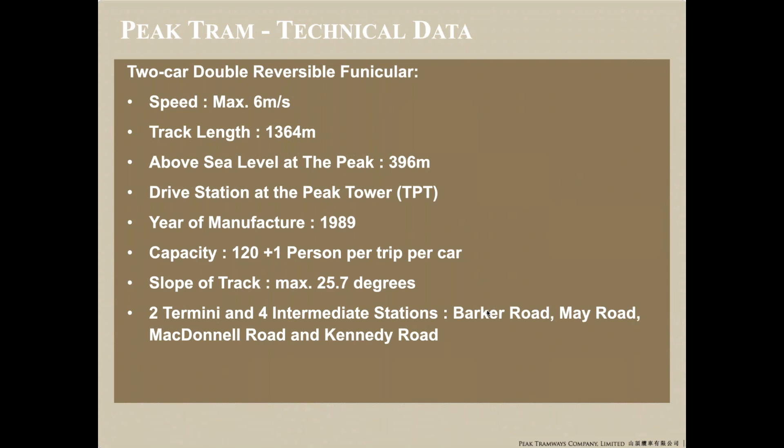And the maximum slope of the track as we get to May Road Station is 25.7 degrees. And that's very interesting if you've ever tried to get on or off a train when the train's at 25.7 degrees, but the ground you get off on is flat. So that's quite an interesting demounting point.

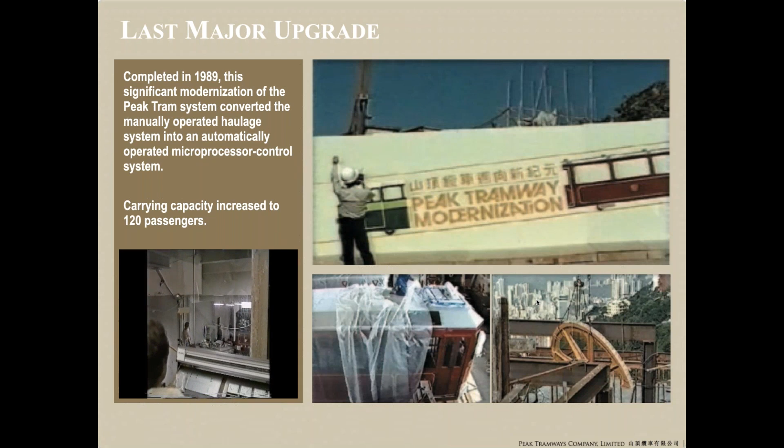And here is some of the 1989 modernization. We have a documentary from the 1989 renovation, and it's quite fascinating, and you'll see in this little clip that's running, hopefully running okay for you bottom left, the complexity of that PLC logic controlled system for computer controlling the equipment, and the old teletype printers. But in 1989, that was state of the art.

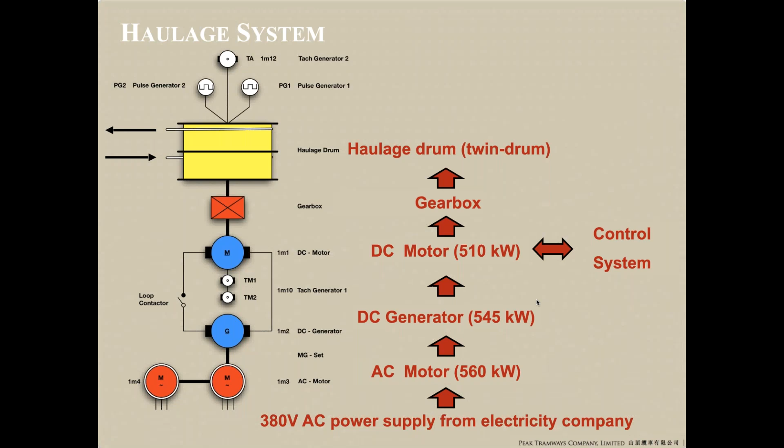How does it work? We basically get 380 volts AC from the local electricity supply company, not yours, Jim, it's the one on the island, I'm afraid. That runs into an AC motor through a DC generator into a DC motor, and we apply the control system at and on the DC motor. The DC motor then goes through the gearbox to drive the haulage drum, and a lot of our instrumentation is then positioned on the haulage drum.

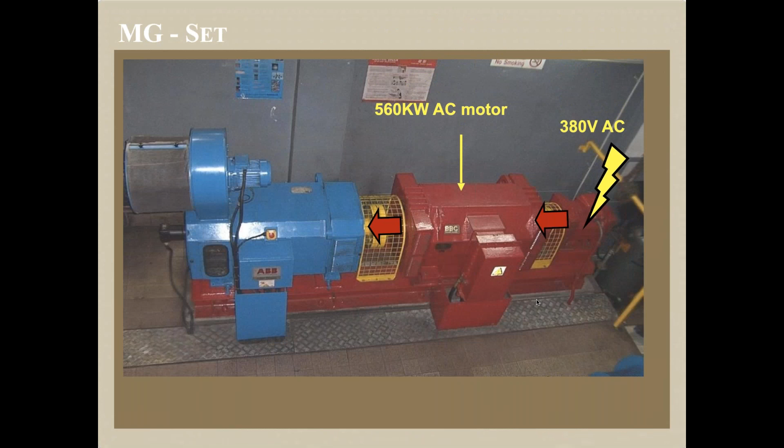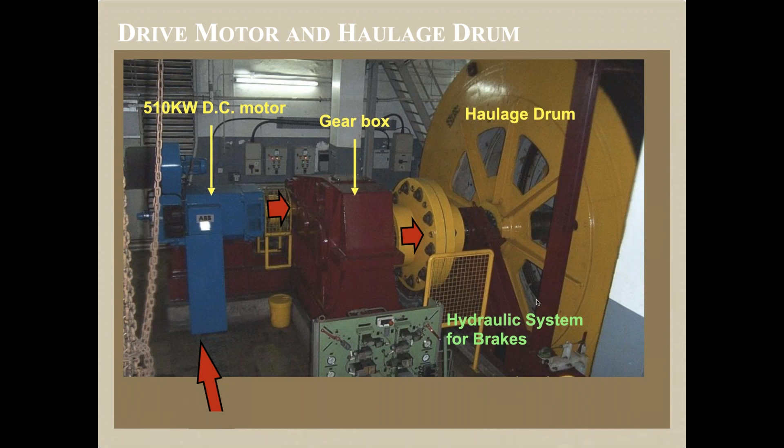Bit by bit, here's the power coming in. Here's a very old AC motor into a DC generator, through floor trenches, across to the DC motor, across to the gearbox, and across to the haulage drum. And just at the foreground of the picture, you can see the hydraulic system, which then feeds the brakes.

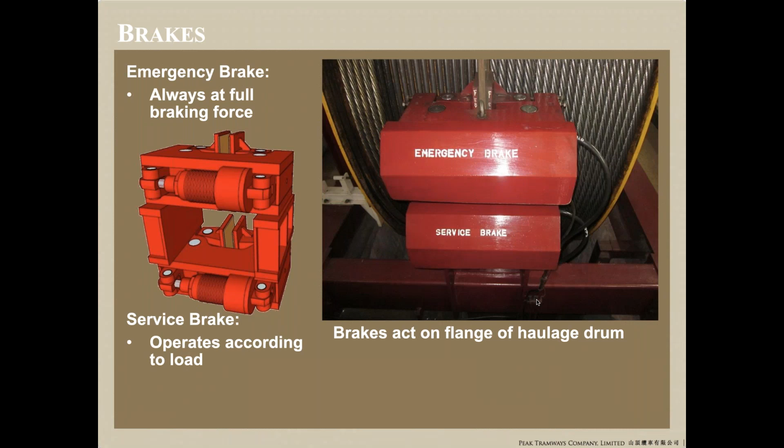And on the existing winch, we had a pair of brakes, 2 emergency brakes and 2 service brakes. We had 2 ropes wound on the drum, each length just over 1.5 kilometers and a diameter of 44 millimeters. So they're quite substantial ropes.

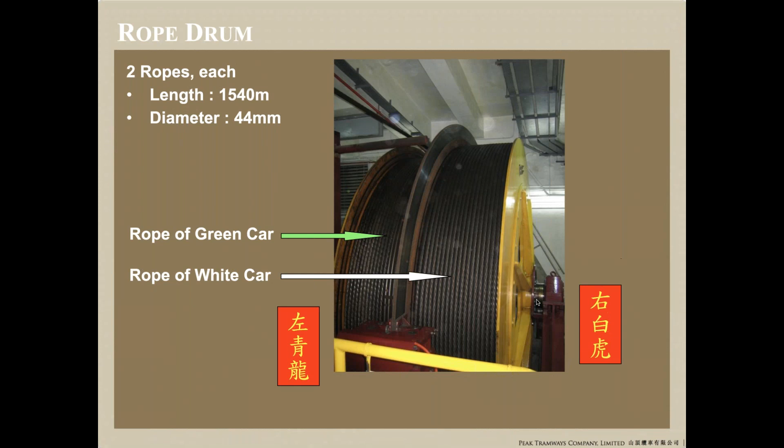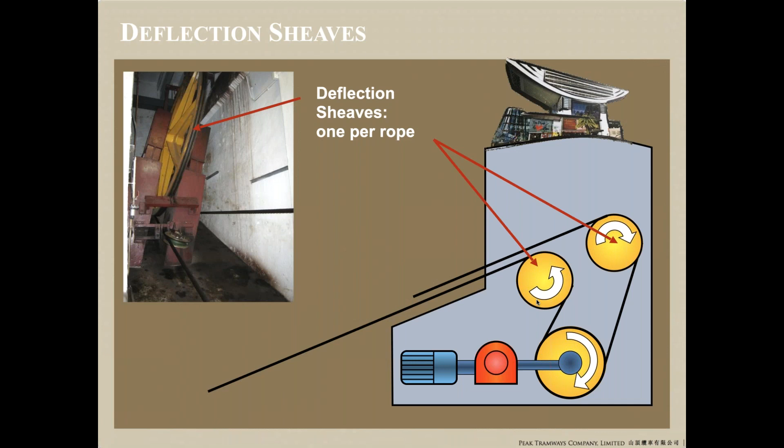Again, there they are, the white and the green car. And then we have 1 winch, but 2 deflection sheaves. And as you can see, what happens is when the winch turns, 1 rope is winding in and 1 rope is winding out, which is why the 2 tram cars then can run in opposite directions as a counterbalance to each other, if you were.

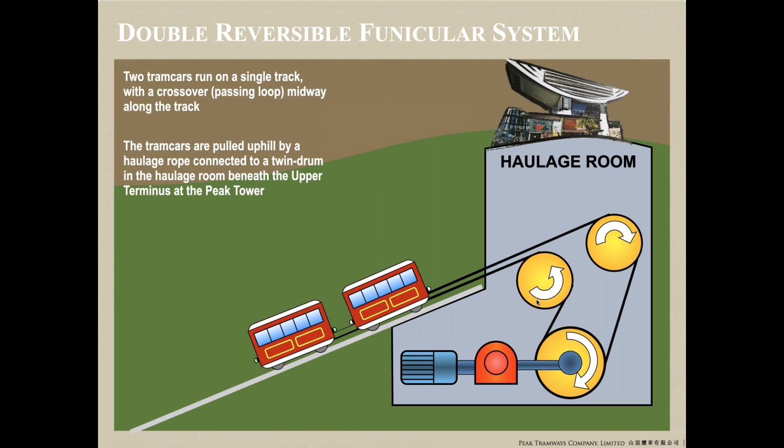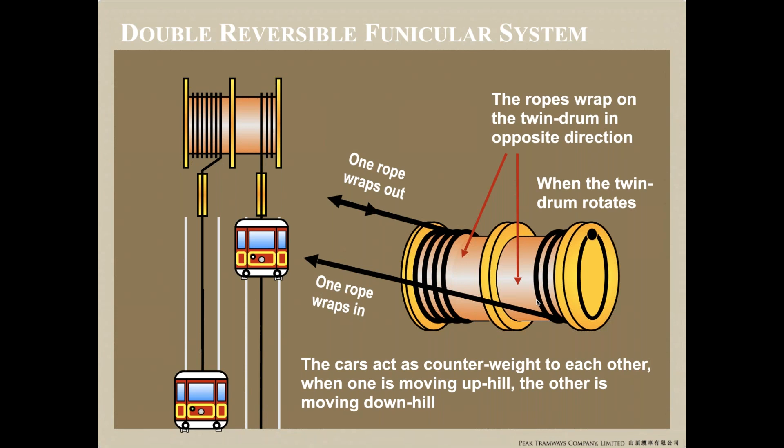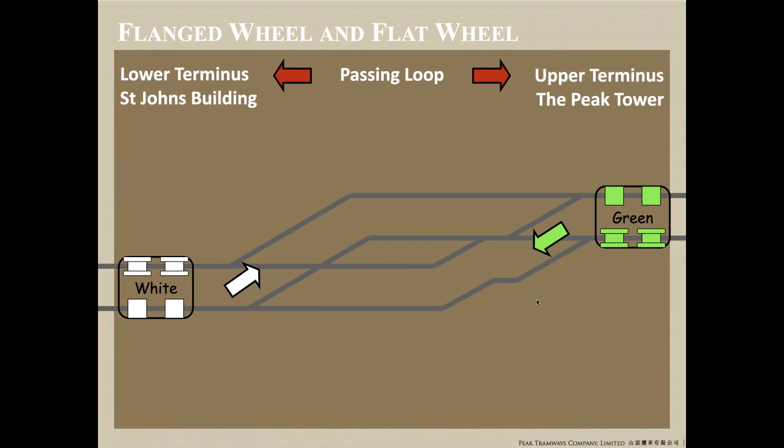The track itself, as said, it's about 1.3 kilometers long. And this is how it works, because on a double reversible funicular with a passing loop, we actually do not have any points. We used to have some points on there to get into a railway siding, but we don't need any points because on each car, and there are only 2 cars, there's a set of flanged wheels and a set of flat wheels.

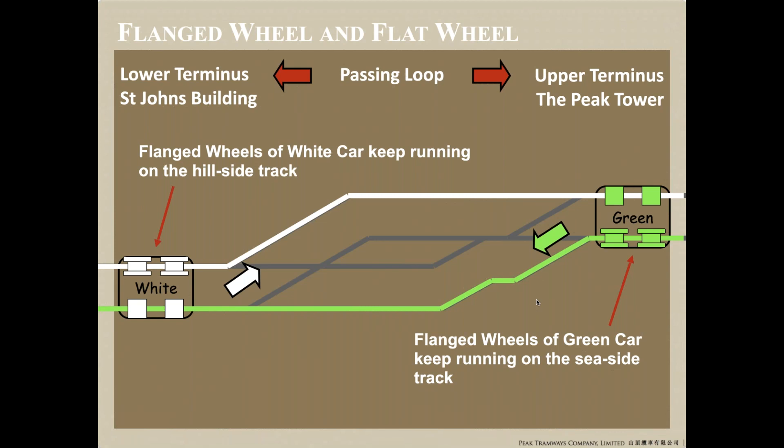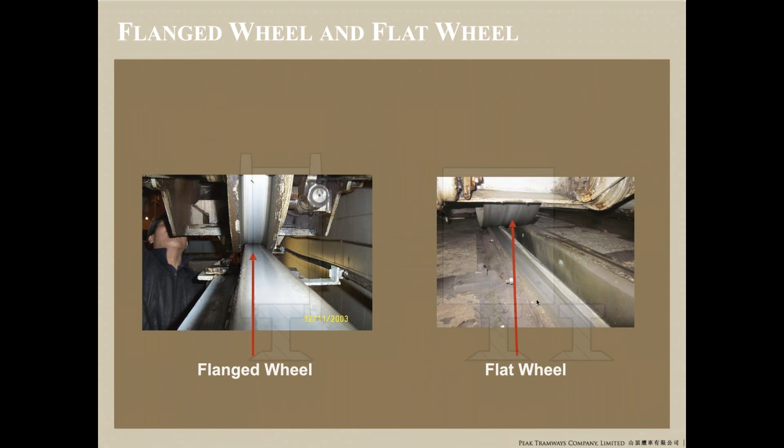And the flanged wheels make the cars run on the outside rail, depending on which one it is. You can see on the left there is a flanged wheel, which hugs the railhead, and a flat wheel, which slides across and allows the tram cars to run over the crossovers.

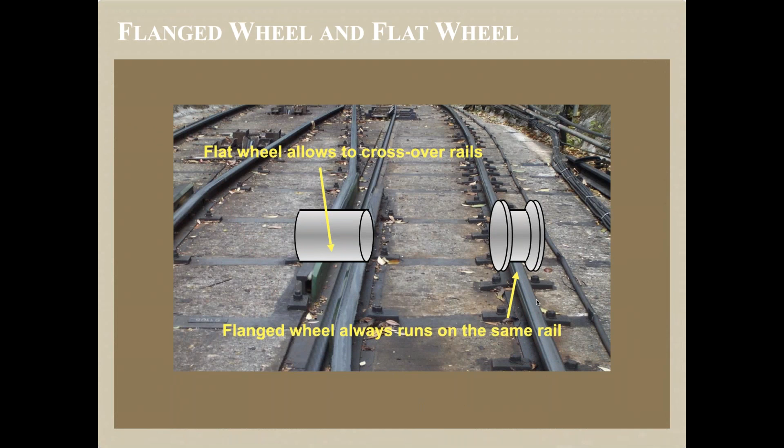And there you get a graphic of the flanged wheel over the outside rail and the flat wheel running across the crossovers. So why am I here? What are we doing?

The challenge as we had it was an increasing patronage. As I said, we became an essential tourism attraction, and as we got up towards sort of 4.5 million passengers, we had a bit of a dip in '97 near to the handover. We had a big dip in 2003 when SARS hit. But since around '97, we've been tracking passenger demographics and looking at the increase in passenger numbers for each of those demographics. I think the peak was in 2016, where we served over 6 million passengers in the year.

And the interesting growth on this graph is that the so-called foreign individual tourists make up the majority of that, which is the green shaded area. But the grey shaded area is tour groups, and there was an ever increasing number of passengers as part of tour groups. And that's important for us as an operator, because we have to understand our business model and our demographics. And then we have to cater our offering accordingly to make sure that our different classes of passenger are all happy with the offering.

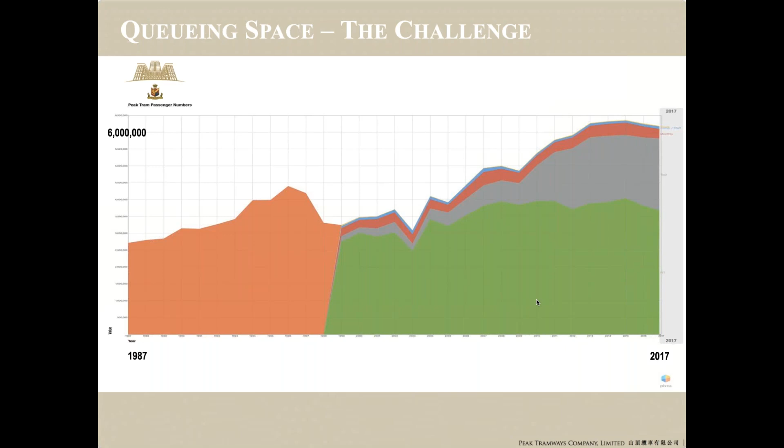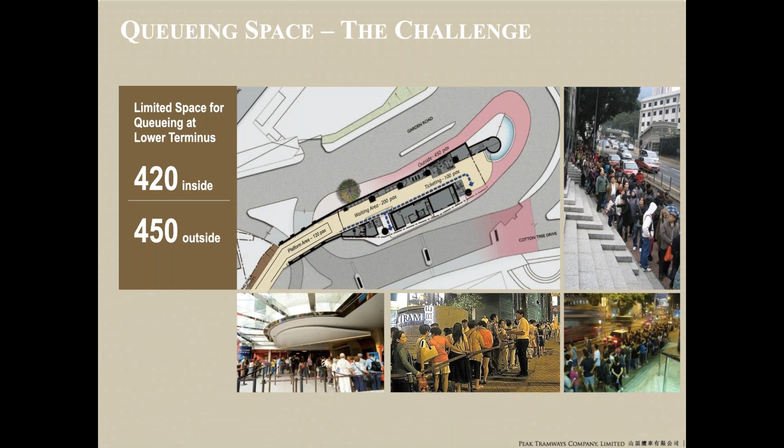The difficulty for us was when we were pulling 6 million passengers a year, it got very busy, and in particular at the Lower Terminus, which is where most people would catch the tram from, there were some horrendous queues which wrapped all the way around the building and out onto the street, because inside the building, when it was first developed, we only had space for about 420 passengers to wait. We could quite often have 2,000 passengers in the queue.

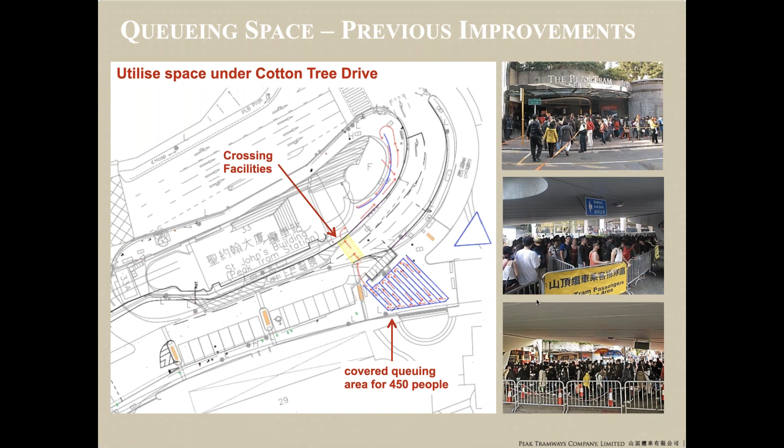To improve matters, we housed some of those waiting passengers. We borrowed a bit of land across the road under the flyover, so at least they were protected from the sun and the rain, and that helped us to stack up another 450 people. But as you can see, during the busy times, queues formed up quite quickly, both at the upper and lower terminuses. The queue times sometimes at the Lower Terminus were over 2 hours, and that was intolerable. So we needed to do something. We needed to do a capacity upgrade.

Now, because of some of the existing infrastructure along the tramway, we run under several road bridges. We can't make the tram cars any wider, and we can't make the tram cars any higher. The only thing we can do is make them longer, and that is indeed what we've done. So the current tram car shown bottom right is around 18.7 meters long, carries 120 passengers. The proposed tram car is just over 33 meters long, carrying 210 passengers.

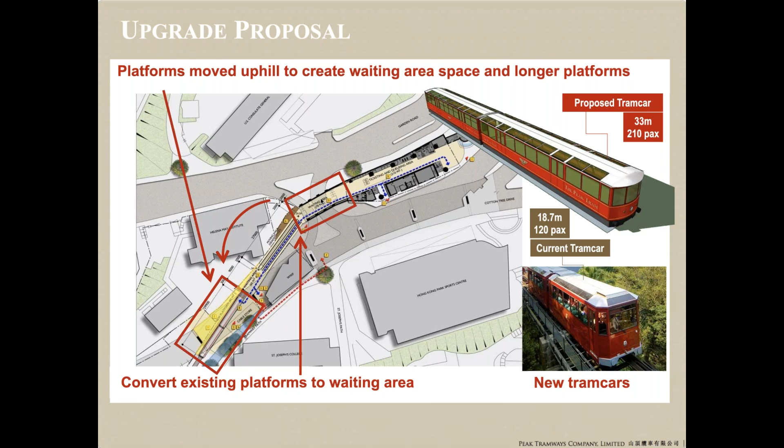And what we had to do was actually move the platforms from the existing platform area, which is here, attached to the St. John's building here, and move it up the hill by about 75 meters. And what that allowed us to do was, first of all, get this very long articulated tramcar into the platforms. It wouldn't have been able to turn the corner into the old building. And it also then creates a lot of space downhill of the new platforms, so we can create a new terminus to house people who need to wait. And that is why we came up with the Peak Tram upgrade project.

A quick comparison of the main technical headlines here, and the one worth noting is the length. We've shortened it by, let's say, 75 or 80 meters. The capacity goes up from 900 to 1575 passengers per hour per direction. The haul rope diameter goes up from 44 to 50.5 millimeters, which is quite a substantial haul rope. And clearly then our peak motor power goes up quite substantially as well.

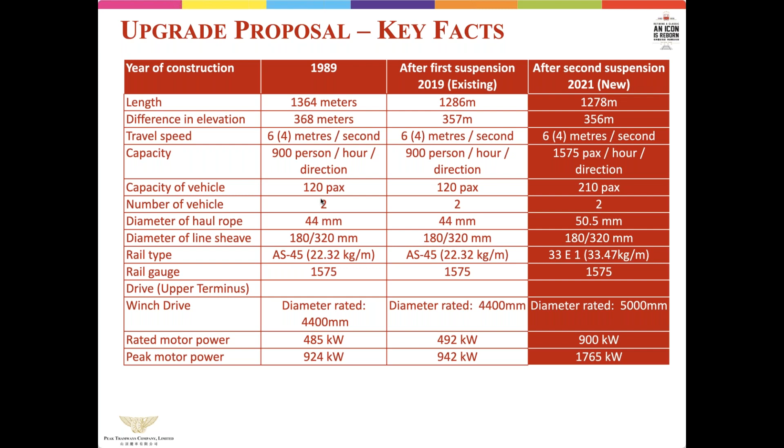To allow us to do that, we have to change the rails and the ropes. We have to do significant foundation and bridge strengthening to take the extra weight. We've actually had to demolish and remove and reinstall brand new haulage equipment at the upper terminus. We need a new, bigger winch, a bigger gearbox, bigger motors, bigger electrical and control cabinets, deflection sheaves, and an item called a rope length compensation device.

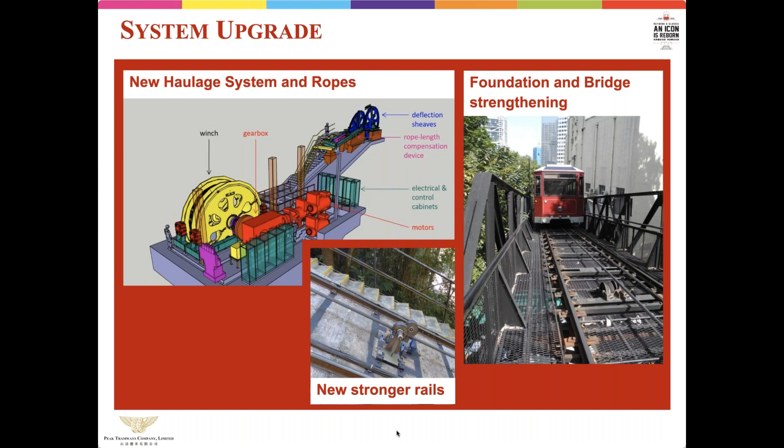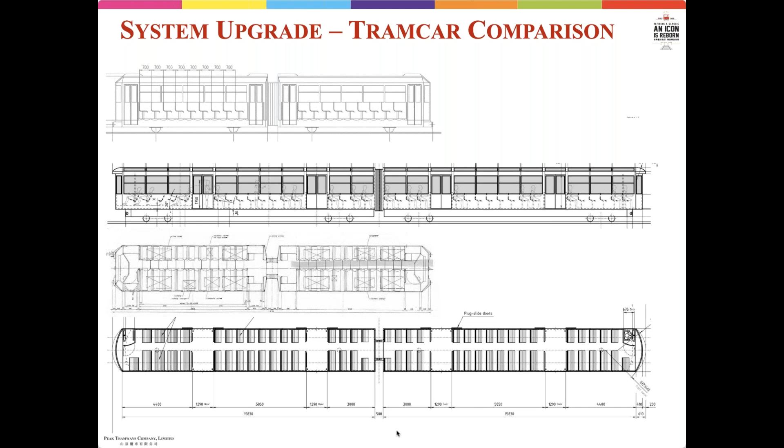Here's a comparison on the tram cars. And as you can see, the increase in length there and the additional number of seats that we've managed to install. I'm not showing you the color of the tram cars because that's not available yet.

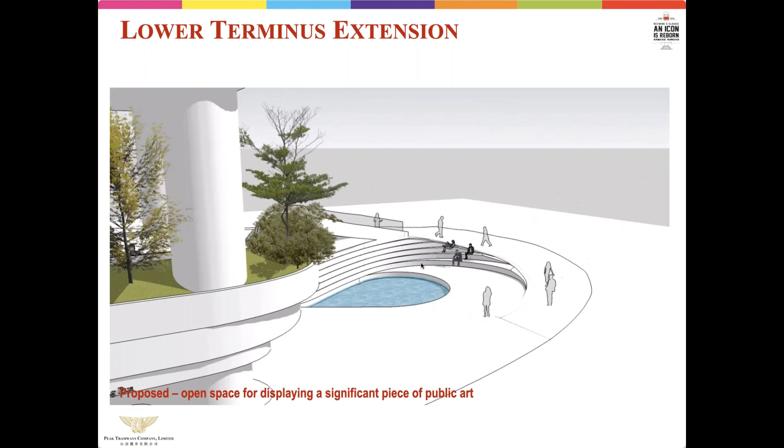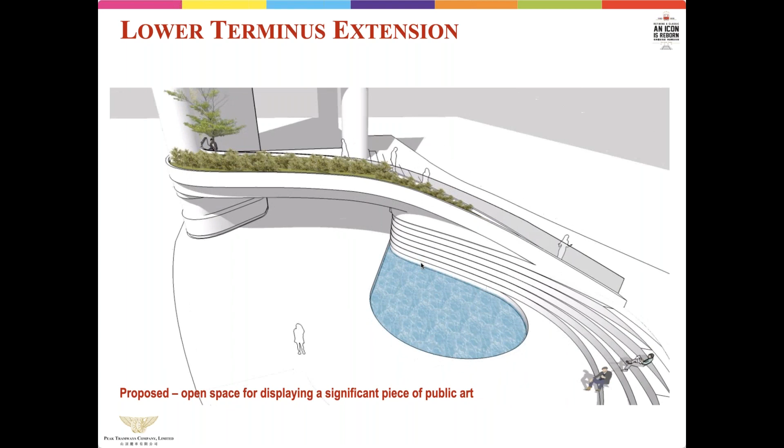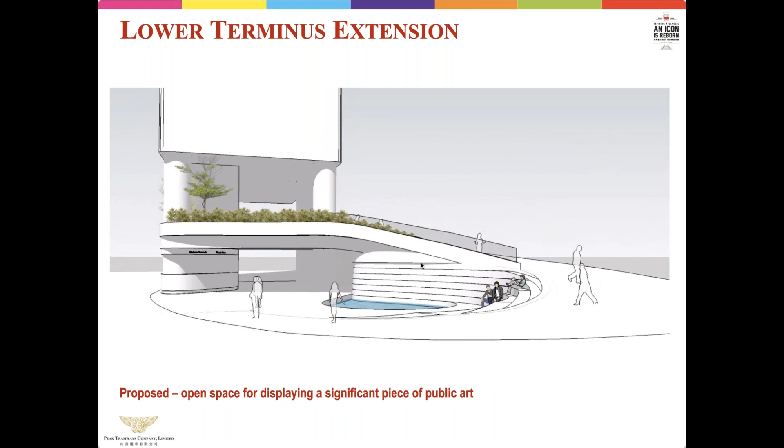But what we ended up doing was a sightline study. We had a study of all our traffic routes in and all our percentages of different demographics coming in from different positions to make sure that everybody could see the new open entrance from each of those incoming points. And then we created this big open space. And within the water pond, we have a significant piece of public artwork, which is actually just being boxed up and put in a container to come to Hong Kong so we can install it fairly soon. And this is the later artist's impression of what it was going to look like.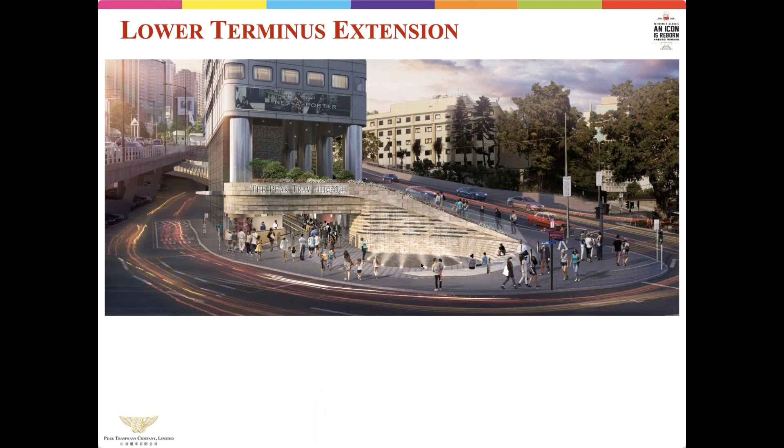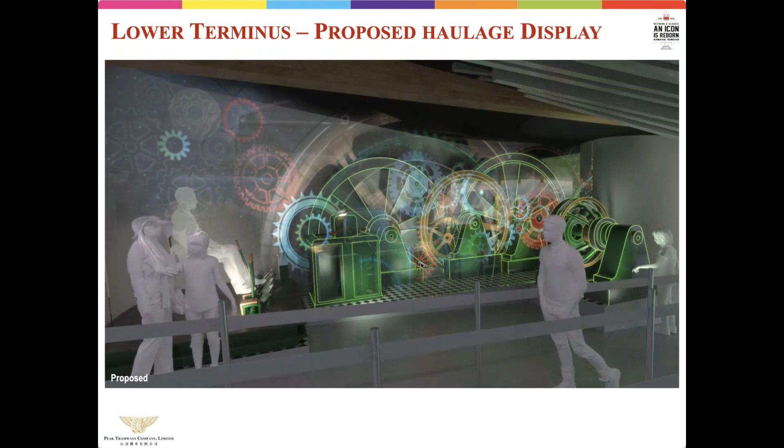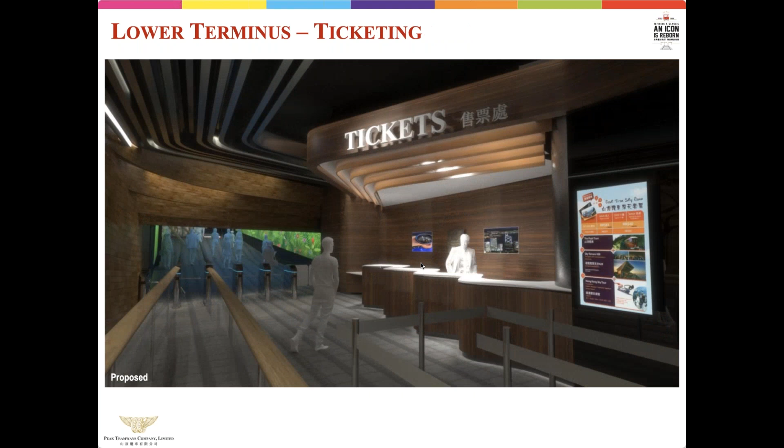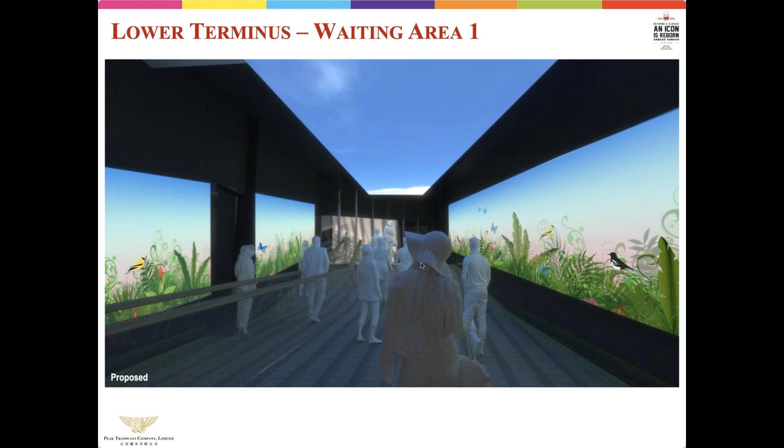We're also then obviously going to fully gut refurbish the interiors, lots more queuing space. We've got quite a bit of old haulage gear to display in there. So we've made the most of a lot of our historical artifacts. We've increased the number of ticket counters because if we're carrying more passengers, we need to be able to sell more tickets to get people through the ticket gates, so that is not then becoming a bottleneck in the system. And then in the waiting area 1, which is part of the batching process, there will be an AV installation with a show just to keep people interested and happy during the period that they're waiting.

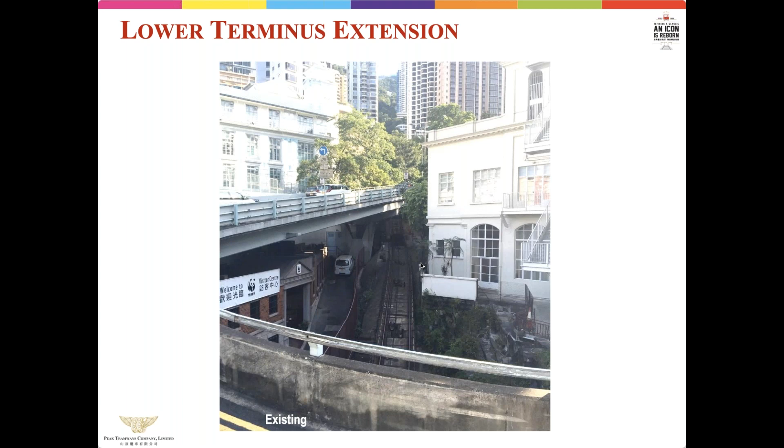And this is a view up the track. The lower terminus is in the building directly below us. And as you can see, it's a very, very narrow site. And on the right-hand side is a declared monument. And on the left-hand side is another declared monument, which means that the Antiquities and Monuments Office were very keen to know what we were going to do and how we were going to manage it and protect these old and historically preserved buildings. Because what we wanted to do was put a glass and steel enclosure over the travelators so that we could get our passengers up the hill in relative comfort.

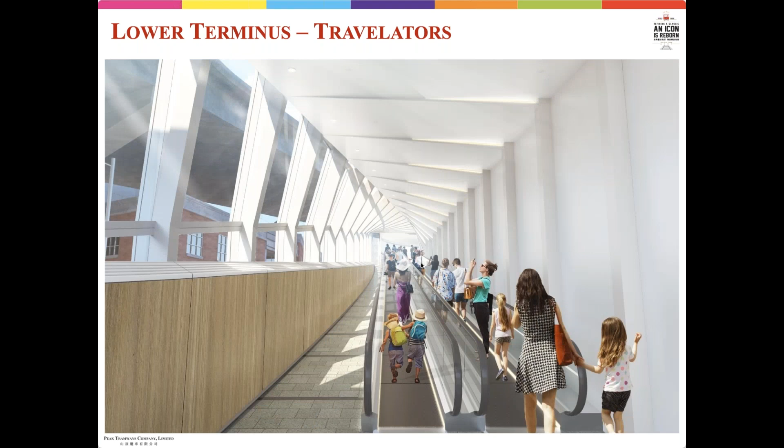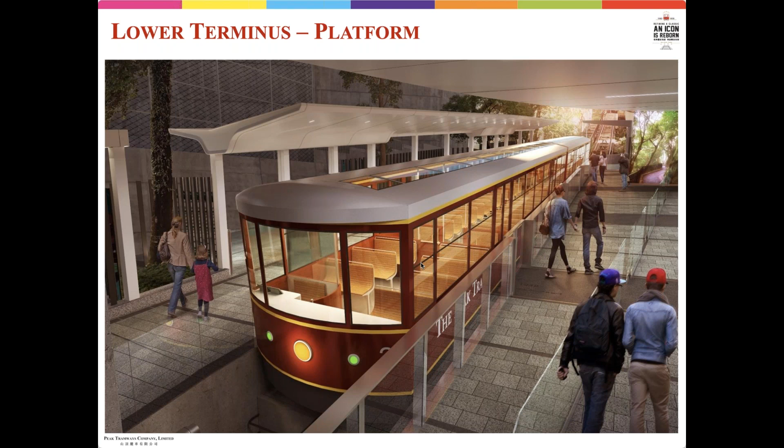That's the pair of travelators that are going to climb their way up the hill and eventually up to the platform there. The platform itself is open air because it's part of the transition from the air-conditioned environment in the ticket space through a mechanically ventilated transit area through an open and naturally ventilated platform. We were also, shall I say, obliged to upgrade some of the surrounding infrastructure. So all our passengers will now discharge onto Tramway Path, which is part of one of the main nature walks in Hong Kong. So we'll be upgrading all the finishes down Tramway Path.

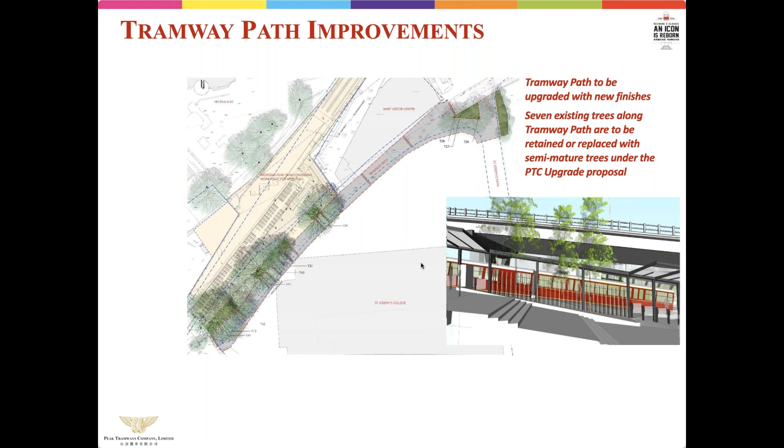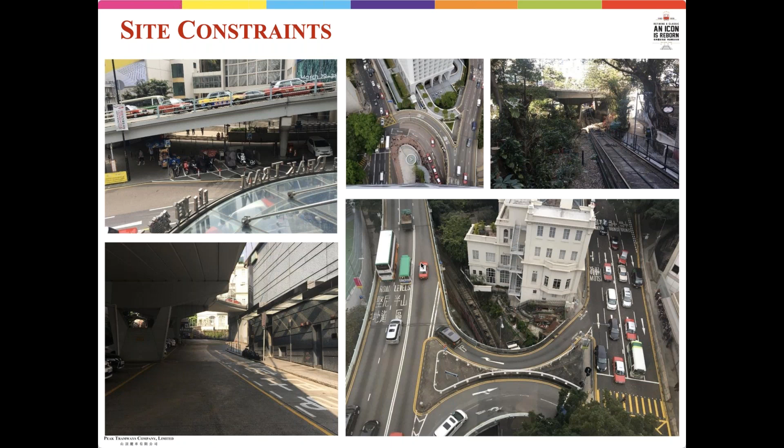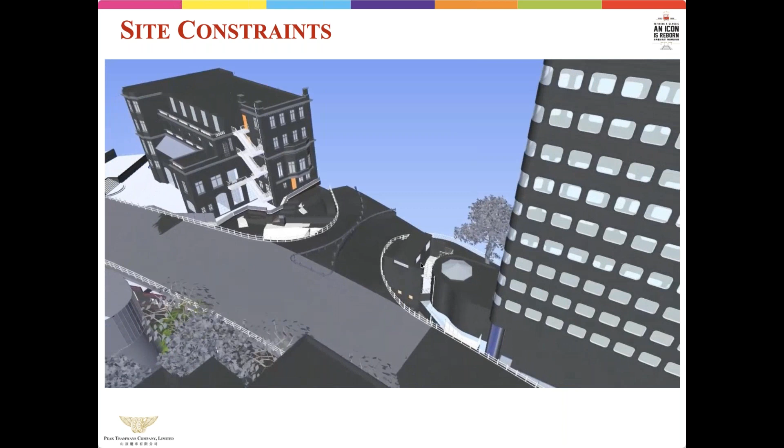And what we've had to contend with in most of this is a very, very tight site with very little site area for laydown, storage, contractors' sheds, etc., which presented quite a lot of challenges all the way through the project. We went and did a point cloud survey very early on to produce a BIM model so we could understand what the surroundings looked like and that we could model the new space within that and maximize the volumes and the areas that we were able to build, and that proved to be very useful. I think unfortunately for us, the consultant team didn't follow through with the BIM modeling into the design, which I would have preferred them to do. But certainly the point cloud and the BIM modeling of the existing infrastructure was a worthwhile investment.

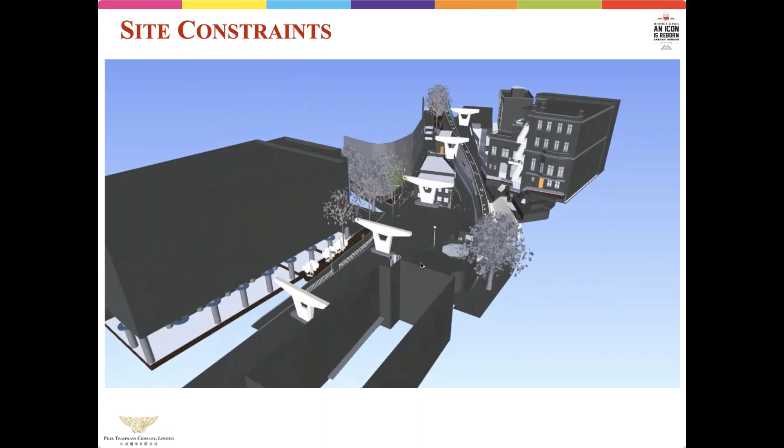As I say, here's the Lower Terminus, arrival, ticketing, waiting, travelators and waiting area 2. And to enable us to do this and to enable us to discharge passengers correctly at the Lower Terminus, we had to go to government for 3 really thin slivers of land. The one on the left-hand side here, we needed a thin sliver of government land for the extension of the passing loop.

As there are 2 cars on the same track, if you move the bottom point upwards by 80 meters, you're clearly moving the passing point up by 40 meters. So we had to take a thin sliver of land about 2.5 meters wide and 45 meters long, so we could build track bed and lay new track on the extended passing loop.

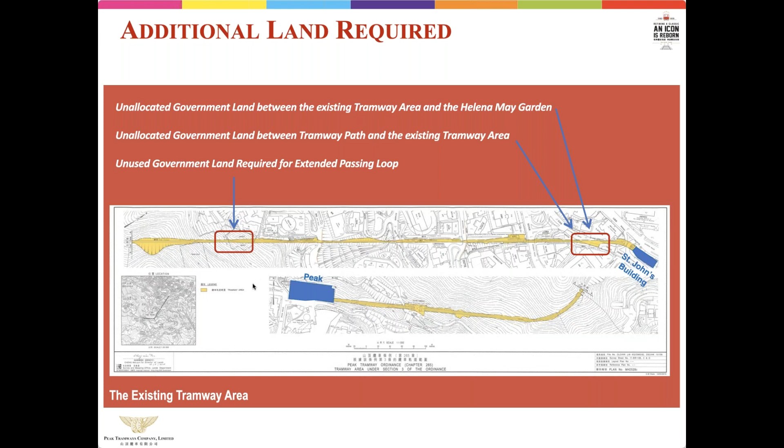And at the Lower Terminus, we needed 2 additional areas of land. I'm going to skip through this video, forgive me. The yellow one was a bit of dead space landlocked between the tramway area and the adjacent lot, which is the Helena May Institute. So we applied and successfully got that portion of land.

And the blue area is the area between the existing tramway and Tramway Path. Again, it was government land, it was unused, it was unallocated, and it was quite useless. And we applied for that. And that took a little bit of getting, but what it also did was it gave us 7 trees to look after, which we never had before.

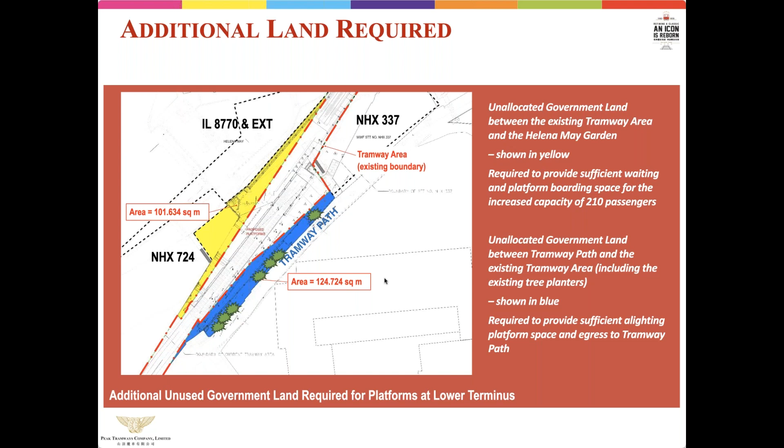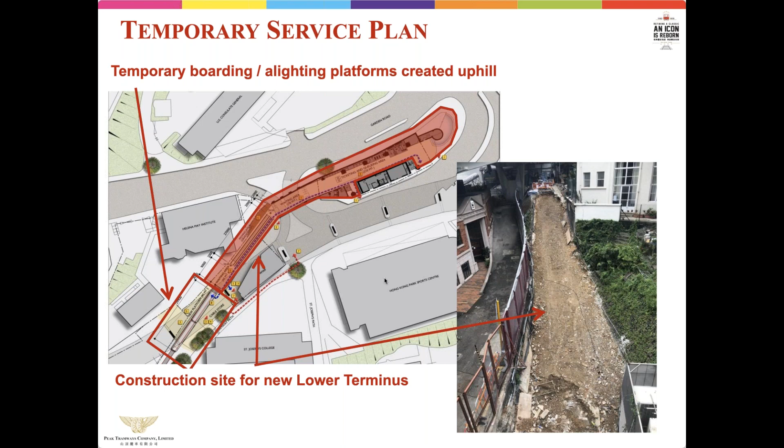But what it allows us to do then is to move the platforms uphill, which is to the bottom left of the picture. And that then allowed us to create this huge construction site in which we could then build the new Lower Terminus. We did a lot of passenger flow modeling so we could make sure our batching worked.

And you can see here, batching people through the queue system into waiting area 1, then they are released up the travelators into waiting area 2. People board, people discharge, people then get onto the platform. And we try and batch people through in sequences of 8 minutes at busy times with our 210 passengers every 8 minutes.

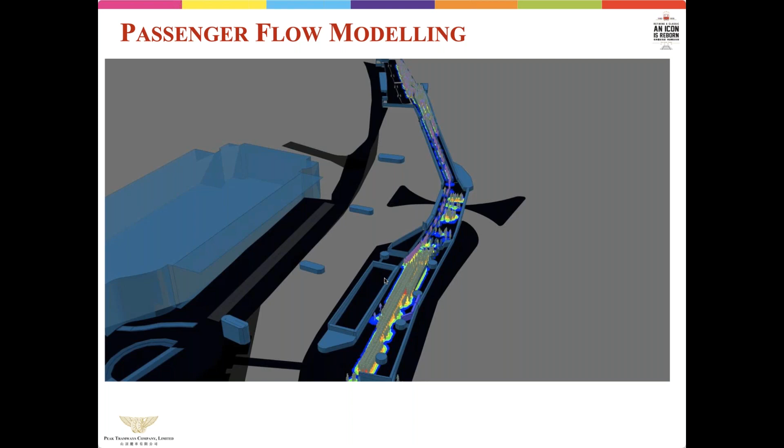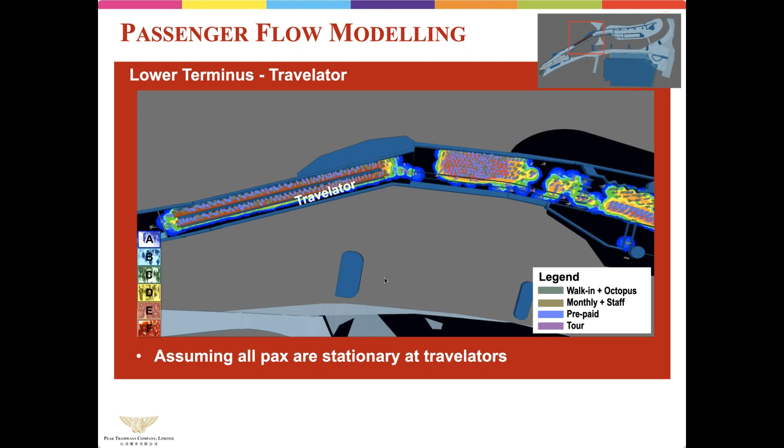We also did some passenger flow modeling on the pinch points, if you like, in waiting area 1, which is a holding area, and on the travelators themselves, just to take a look at what our level of service was. Amazing that in passenger flow, we still look to that 1960s text by Fruin on levels of service and passenger flow modeling. Even using computer techniques like this, we still refer back to Fruin.

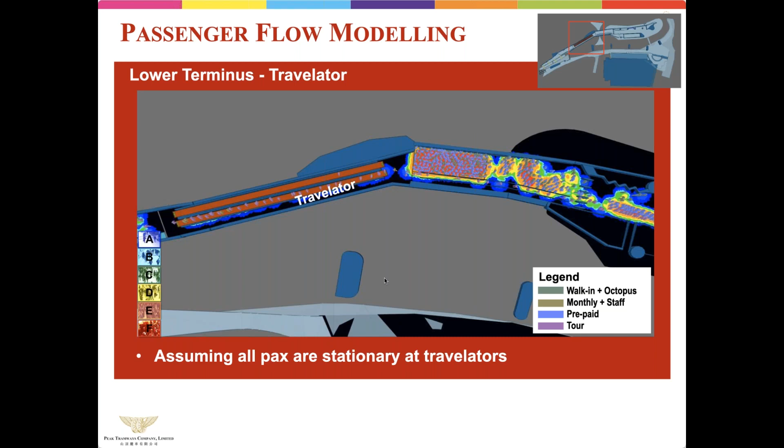To enable us to do this, we had to put in place a temporary service plan, because whilst we were doing the construction, the tramcar was still operating. So anybody arriving at the lower terminus at the old fountain area would be escorted across the road and into a queue depending on their particular demographic. They either had tickets or they were there as part of a combination package with some other attractions, or they were part of a tour group.

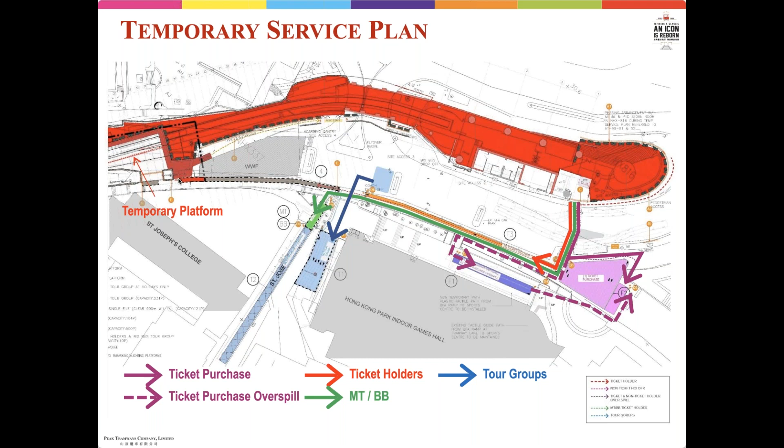And what we did was we batched them into those queues, and then into this single queue here where they were all ticket holders, and then onto the platform and onto the tram. And here's a view of our ticketing, our temporary service plan queue running up Tramway Path, and the giant hoardings that we put around the construction site.

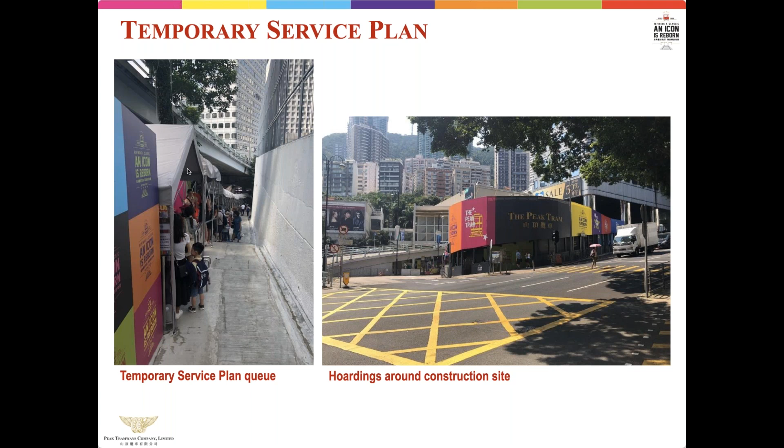And here's the temporary platform itself that we built. We just laid concrete either side of the existing tracks, put hoardings up to protect the passengers from the surrounding areas, and we ran off this temporary platform for quite a while.

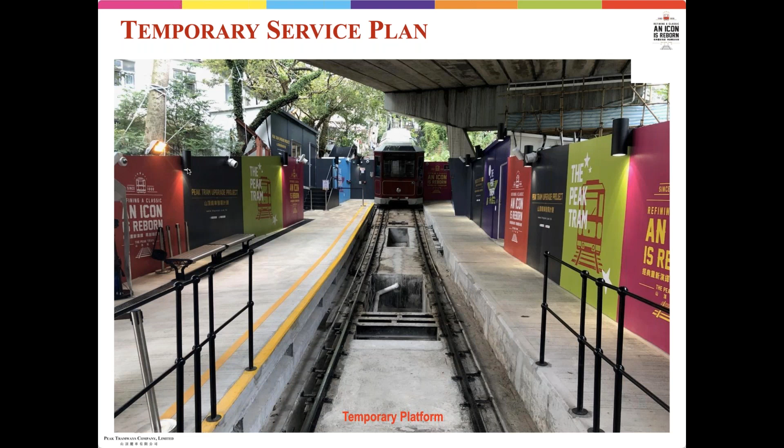The upgrade benefits, and the ones that we were working on both as a business case and as a justification to government, the key one obviously was a capacity increase of 75%, to reduce waiting times by over 80% and completely remove the queues from outside the two terminus buildings. Importantly also, we improved Peak Tram access for disabled passengers.

The old Peak Trams that had just retired had 2 steps into the trams from the platform. So getting a wheelchair on and off was, shall we say, a difficult process and not at all convenient for a wheelchair passenger. And obviously we want to provide covered, air-conditioned, comfortable waiting for up to 1,300 people.

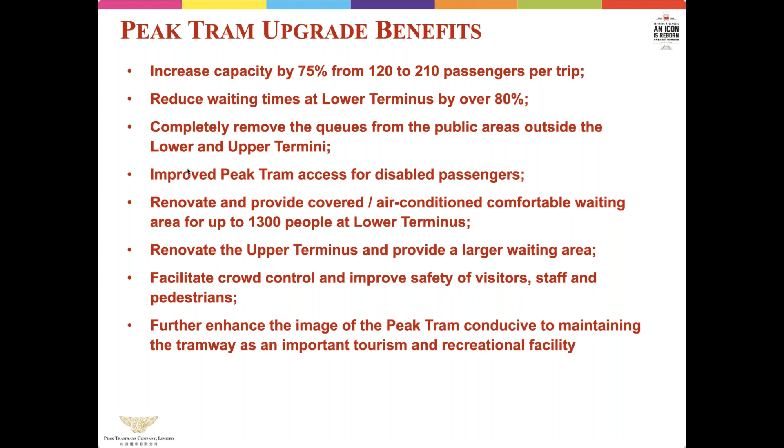Some of the improvements for passengers with a disability: the new tram cars are now level with the platform, there are wider doors that allow roll on, roll off. It's all 8 doors with wheelchair fixings at each gangway. There's a wheelchair lifting platform to be installed.

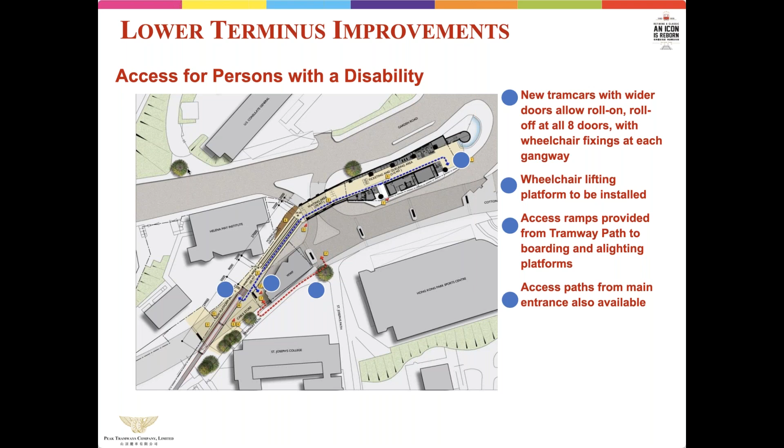We're making sure that we have step-free access from the disabled parking in Tramway Lane all the way up to the platform. And also, if required, you can arrive at the main entrance in the lower terminus and make your way all the way through to the platform, again, step-free.

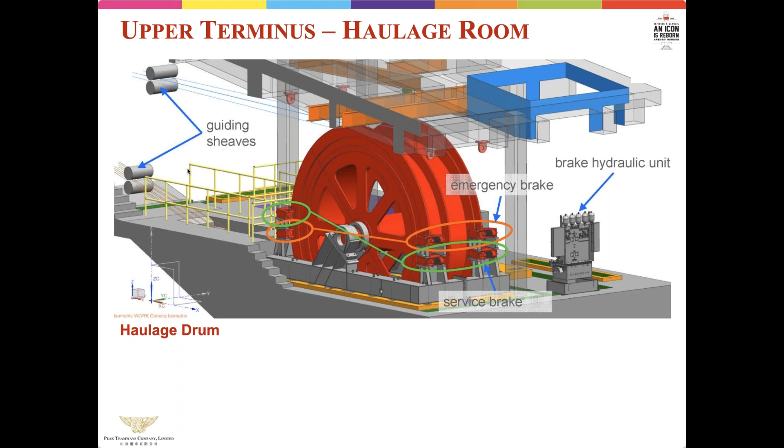In the haulage room, obviously, we've got a lot of new equipment to install, new winch, new gearbox, etc. Because of the size of it, we now have 4 emergency brakes and 4 service brakes on this increased winch drum. We have 2 motors running in line, running into the gearbox, and the joy of that is if one of the motors crashes out during the day, we can put it into free running mode and run on one motor, albeit at a reduced speed, and then overnight we can swap out the motor for the spare that sits alongside them in the haulage room.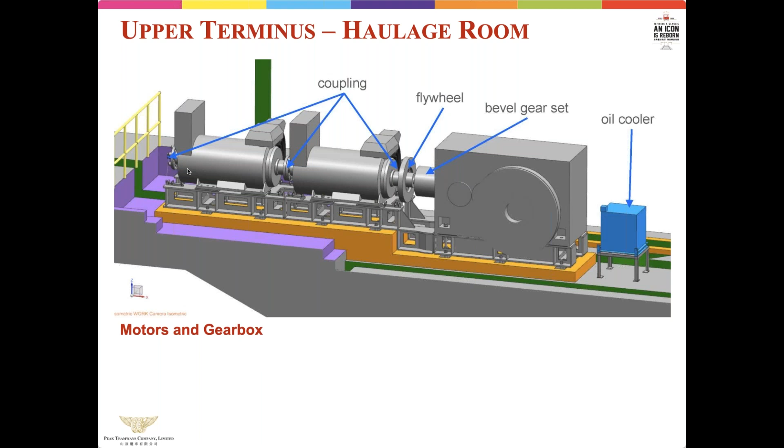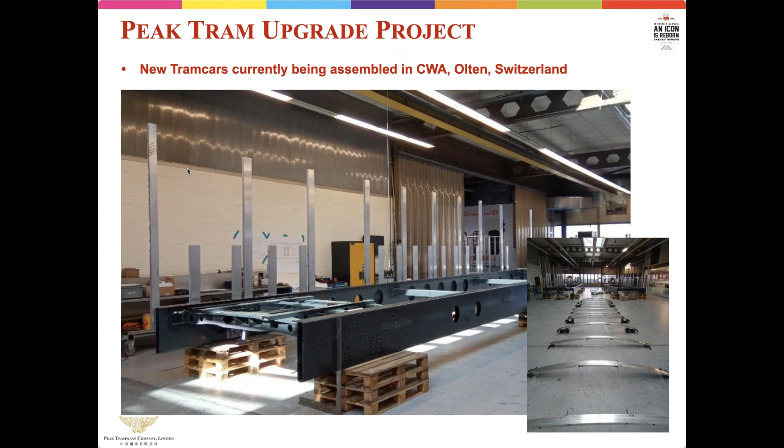We've had our tram cars designed and built bespoke in Switzerland by a manufacturer of tram cars and gondolas and aerial tramways, etc. And I must say that was one of the most enjoyable parts of the job. To be able to design a vehicle from scratch in that way was quite rewarding.

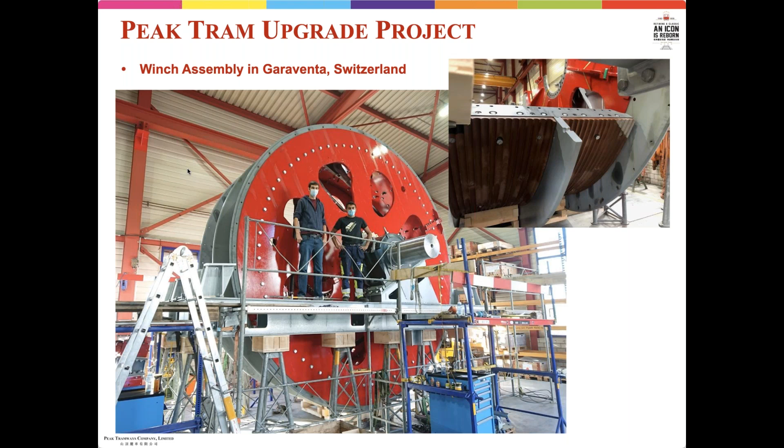And here's a picture of the guys doing a pre-assembly of the haulage winch drum in the factory in Garaventa in Switzerland, just to make sure that it can all be assembled as intended. And then they knock it down, pack it into crates, ship it on a barge down the Rhine, and then on a cargo vessel out to us here in Hong Kong.

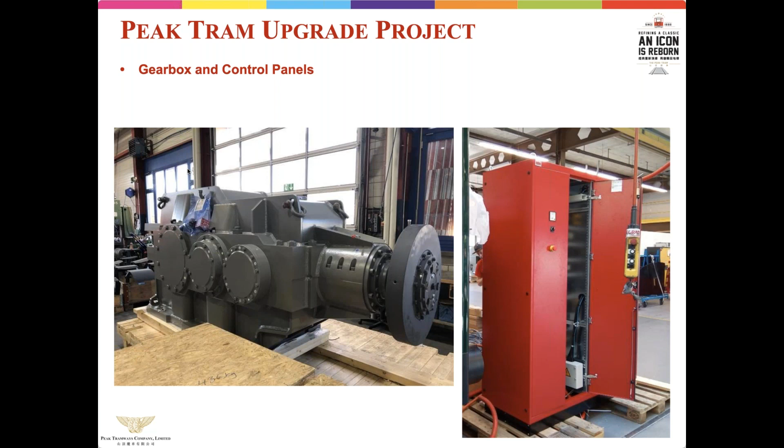On the left here, we have the gearbox, imported from Sweden. The gearbox weighs 17 tons. It was extremely difficult to get that gearbox into an underground haulage room through a tiny hole in the platform floor, but we managed it by tipping it on its end and then turning it round inside the haulage room. And on the right, an awful lot of new control and power panels.

The companies that we've used, and there aren't many companies in the world that can do funicular projects, in particular Garaventa, part of the Doppelmayr group, have been very good so far.

So that's a little bit of history and technical information, and project scope information, which might be very interesting, but you're all sat there by now saying, well, what about the project management? So because this is the APM and we are talking about project management, I just want to spend a few minutes talking about some of the aspects of project management of this small but extremely complex endeavor. And the first one that I want to talk about is the stakeholders.

Now, on a project like this, we do have a lot of stakeholders, and we ran a very comprehensive stakeholder management study and plan. Not only for the two declared monuments either side of us at the Helena May, but also all the way along the tramway, and also some of the political stakeholders as well, which I'll show you in a second.

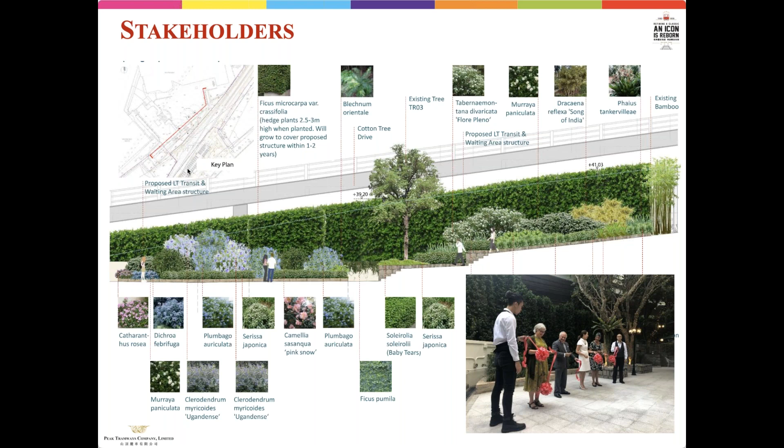And in the bottom right, you can see a very delighted chairman, third from left. That's our chairman. Jim, that's your chairman as well. Just opening the ribbon when we'd finished with the Helena May garden.

It was very important for us to get stakeholder buy-in from District Council for things like the land acquisition, but also for the traffic impacts that the construction and the final terminus, when finished, will put onto the traffic systems at the top and bottom stations.

Now, for those of you who don't know or might not remember, in Hong Kong, projects that are built on leased land are generally under the control of the Buildings Department and the Buildings Ordinance and Building Regulations. But those projects that are built on government land are approved and managed by the relevant government managing department. Now, the tramway, since it was built in 1888, has always been on government land, and the Peak Tram is allowed to operate on that government land through an operating right, which is granted every few years on application.

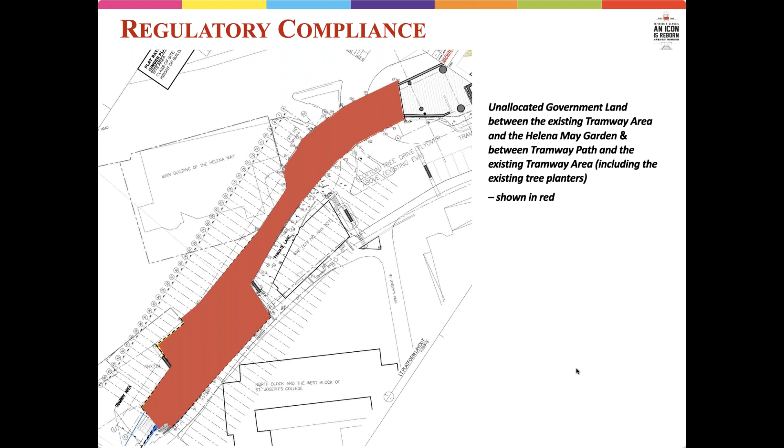Once we'd sorted all that out, and we'd tendered and we'd awarded the contracts, by November 2018, we started the works. The tram system supplier was designing, and the main building contractor, the main civil contractor were on site and mobilized, and progress was good. We then suspended in April 2019, and we were closed down for the 3 months that we expected, when we reopened on the temporary platform after only 3 and a little bit months. And that was fantastic. And I think we did very well with that.

But I would be interested to hear your thoughts on how you embed risk management into the project team's thinking. Now, in my experience, many see project management and risk management in particular as something the risk manager does, rather than being an integral part of their day-to-day duties. And it was quite difficult to get people to do a comprehensive risk assessment on this project. But we did it anyway, and what we tried to do was to break it down into task-based management by giving all of the mitigation actions to those best placed to take them. And we continued through into 2020, mitigating, as I say, all imaginable risks.

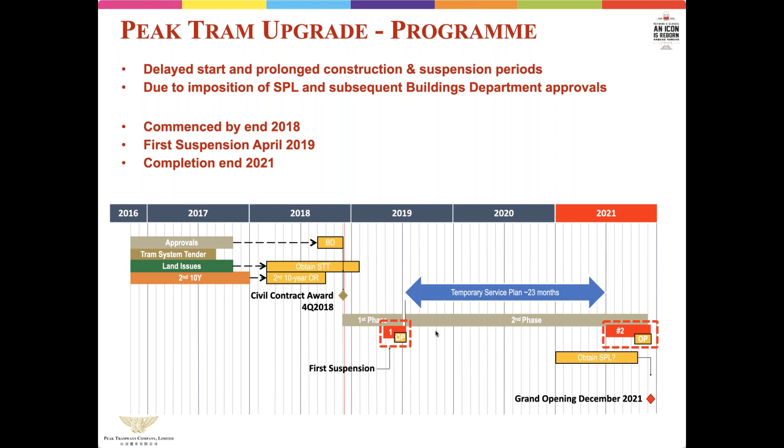And then the defining black swan event of 2020. Who could have foreseen that? Now, you can do risk management with the best will in the world. I defy anyone to have foreseen that. And so here we are, 2 years later, still managing the fallout from that event, whilst making contingency plans that change regularly. Global supply chains stay strained. I mean, we're fortunate that we were able to ship our trams and our haulage equipment from Europe before this summer. But other materials and components haven't arrived on time.

When work from home started, we were in a fantastic position because all of our documentation was online on SharePoint, and all of our consultants and contractors had access to that system. So we had slightly less downtime due to work from home, but not everybody was so well prepared for that. But we've also had local problems. We've had power supply issues across the border in China, which have led to some factories on 3-day working, which has slowed factory production. We've had aggregate and cement shortages that have restricted concrete availability in Hong Kong. And now, right now, travel restrictions are really starting to bite again.